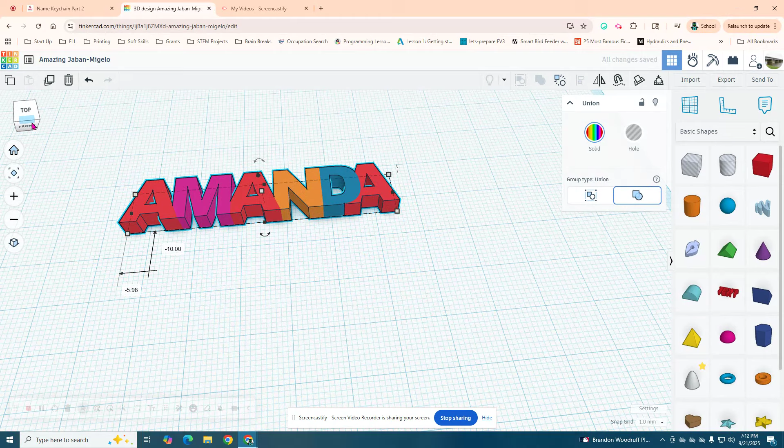I'm going to click there. If you want home, there it is. Zoom in—I like that front angle view. Rotate a little bit around, look at that underneath, up above. Okay, so which letter did I say not to touch? That would be the first letter.

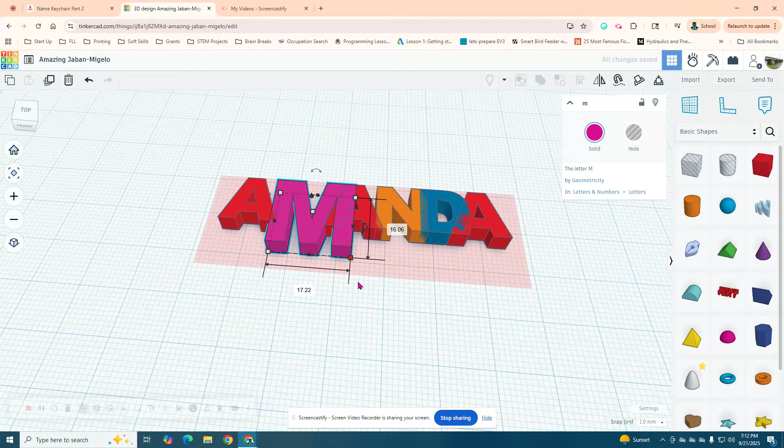We're going to double click on it—that means you click twice quickly on top of it, and you get this red box, which means you can adjust each letter. I can make this one bigger, and you can adjust this. Look, now it's even thicker—I said don't go past 8. I'll set it to 6.

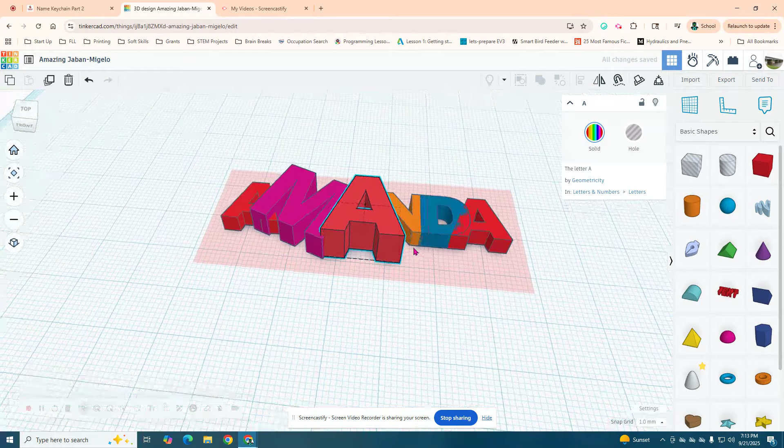It's great, I can drag this over, I can rotate it—look at that, that looks great. Let's make this one bigger—8, that's the biggest it can go. The biggest thickness it can go is 8. By the way, 4 is the default, so you can't make them any thinner than 4.

Let's do the N that way, and I'm going to rotate my N. There we go. My D is going to be down here, and I'm going to drag this and make it bigger. Then I'm going to bring my A over here—customize this however you want. Ooh, 11 is too big, so I'll click on that and type 8.

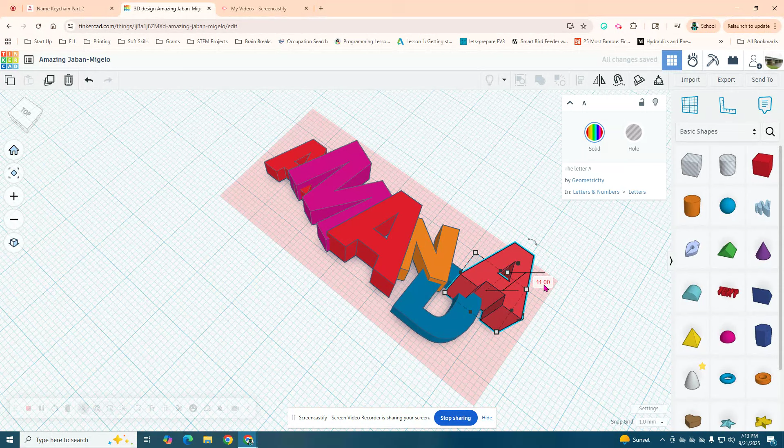I did not hit backspace, I clicked 8. If you ever mess something up—oh no, I clicked something, don't click that by the way, oh no that's bad—go over here and click undo, and look, it comes back down. So it needs to be down, and we are going to fix that.

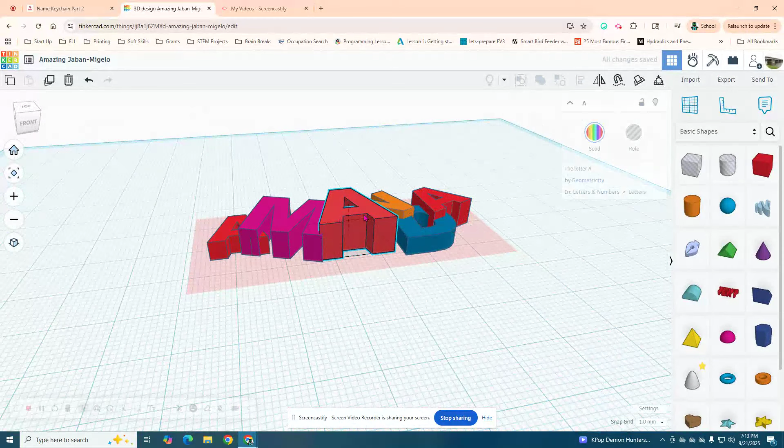There we go. So everything is between 4 and 8. Let's see how big this is—59, that's great, 22, that's great, it's going to be between 75 and 25. So, looking good. That is all I had to do.

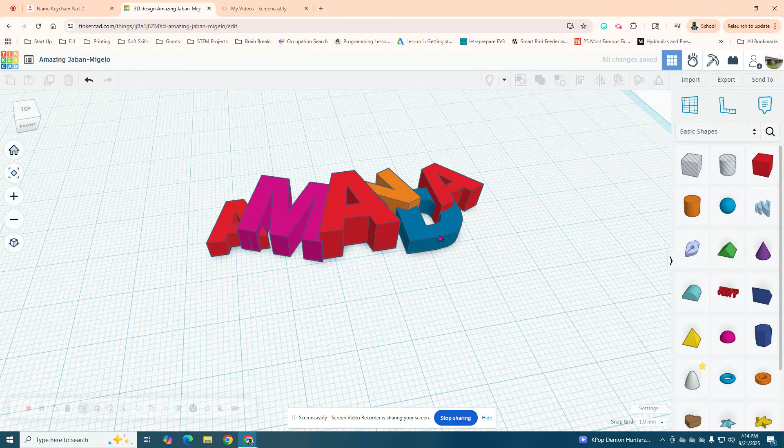If you want to see what this will look like when it's all one color, go ahead and make it all one color. Double click, click, okay there we go. Let's see—oh look at that, sit here and make it all one. You know, I really don't like that color.

I'm going to go with this color instead—that color's prettier, personally. No hard feelings if you like red, red's your favorite color, that's great, we'll still get along. I just like this blue color. Okay, there we go—so that's kind of what it's going to look like when it's all merged together.

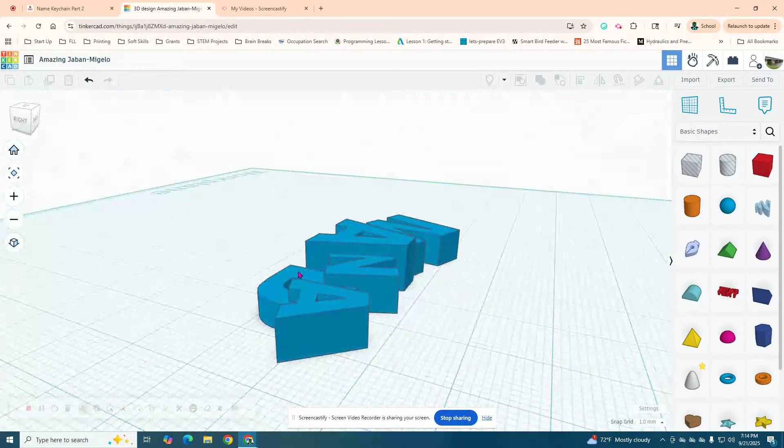Those of you who have A's, it's going to be challenging. You want to make sure, when you check this, that everything is still connected. Notice I'm rotating around, looking above and below, so everything is still attached, and it's attached securely—more than just a little point.

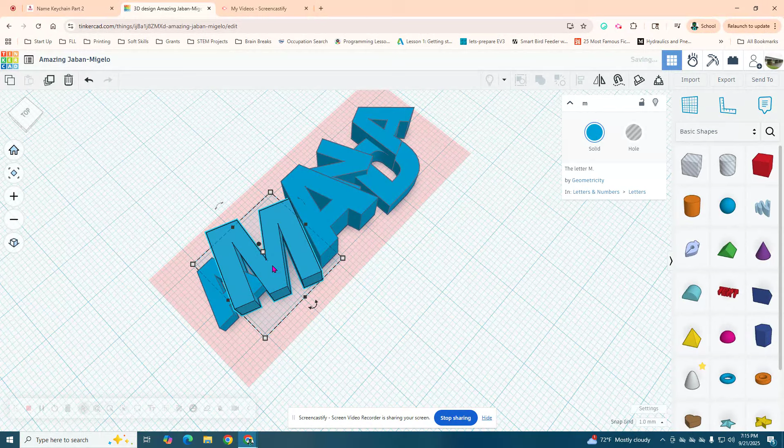Things are overlapping. I'm going to move this over because see how there's just a little point there? So I'm going to arrow this guy over—ooh, not that way, okay there we go, nope too much, there we go. I want that point of my A to touch there. But now, oh no, when I did that I made a gap there.

Well, now I have to fix this. By the way, the scroll wheel is the greatest thing ever. Now I move that A—let me see, is my N still attached? Ooh, it's barely attached, so I'm going to move my N over. You can sit and customize for hours and come up with all sorts of creative things.

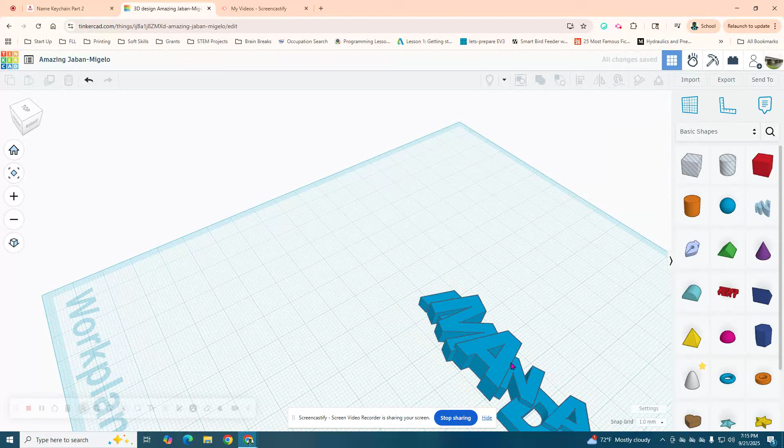So let's go back to the home view, let's look at this, zoom in—looks pretty good. Look from the bottom, everything is connected. Looks pretty good. Okay, so you're going to go over here, mark it as done, and move on to part 3.